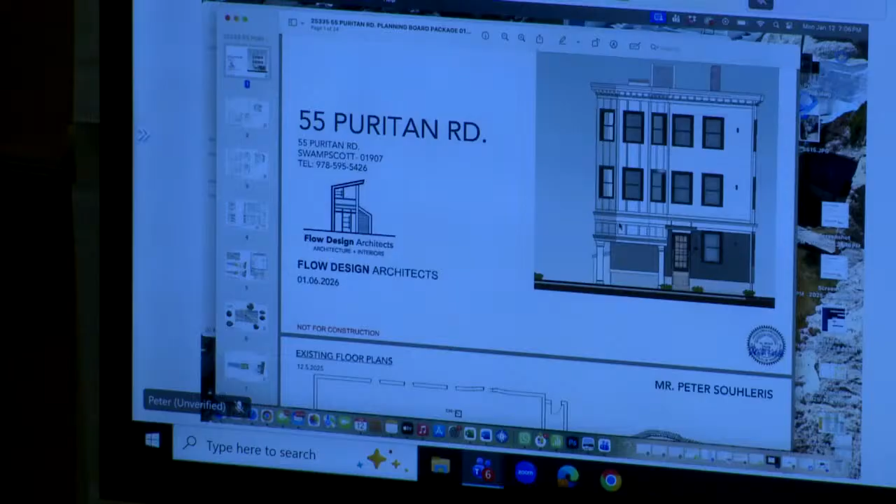All right, let's see if that works. Yep. So last time we were here, we talked about a lot of things, and I believe we did a nice job addressing everything we spoke about, and I just want to go through that with everyone right now. This kind of shows a little rendering of the proposed changes at 55 Puritan Road. I know we talked specifically about, can you see my, yeah you can, so we specifically talked about that front entrance.

Originally, it did not have a band going across as it actually does now - meaning currently. So currently the building has a nice trim band going around the front, right and left. And we had kind of stopped in the original proposal, the columns almost went all the way up to the band, so it did look a little bizarre. I'd have to agree, so we brought it down to something I feel the scale is more appropriate.

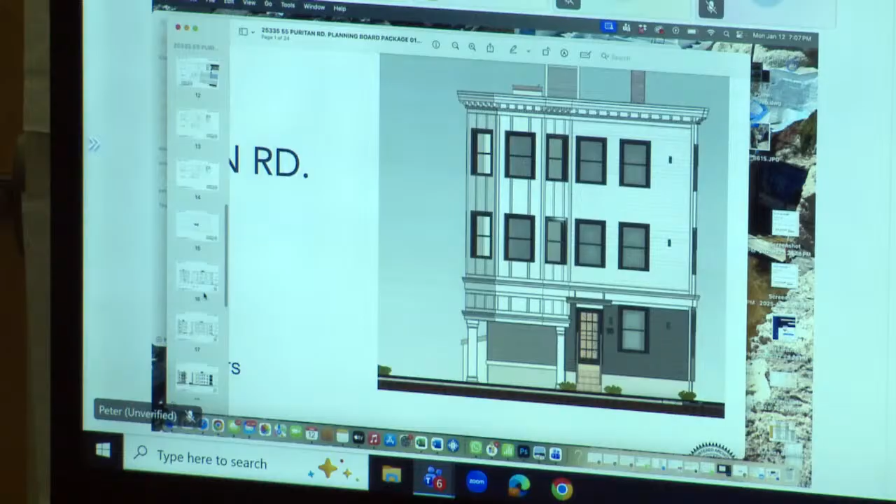We talked with Jer, mostly architecturally. We've played a little bit with a board and batten on the front and a classic siding to the right. But I've got a couple of versions of that, and I'll show you. I kind of nailed it down to two, which is right here. So one is just traditional siding all the way across.

We did add all the dentil work in here, that was not in the original renderings. We always planned on keeping the dentil work, and it was a little simplistic in the proposal, but we put a lot of detail in showing everything. So those are kind of the two options I'm toying with. I really haven't decided, I like them both, so I put them in here. I'm open to some feedback with the board and batten, they're both kind of classic and traditional.

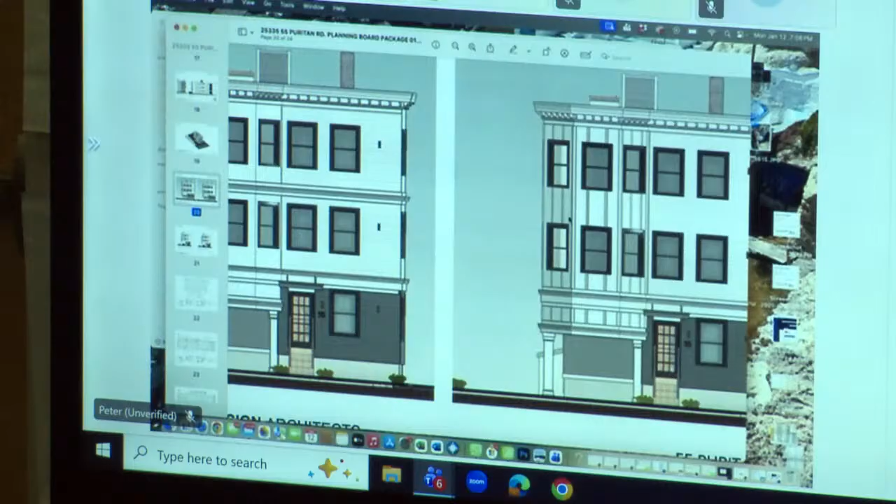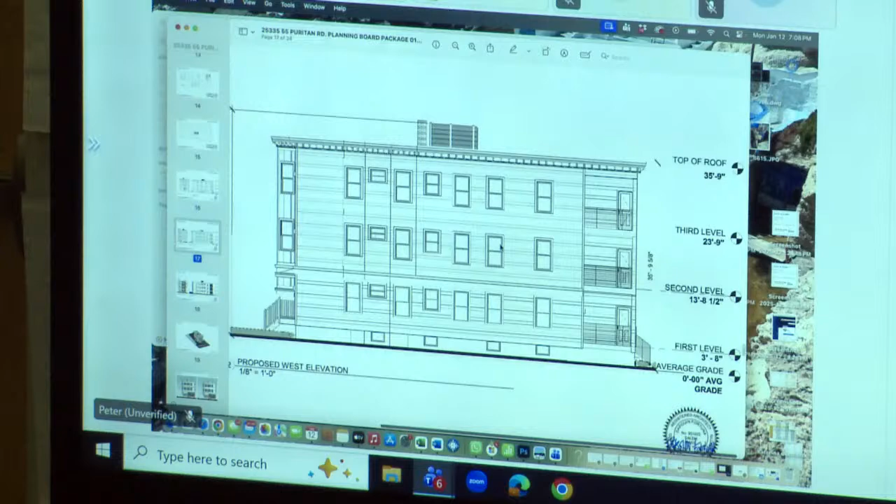But really the major thing we did was change the way the garage looked for parking. And then we talked greatly about the roof and access and elevation heights. So we went in, we did update all of that. We have an elevation line to the top of the roof at 35.9 existing - we're not increasing that. We are looking at a roof hatch and something to cover up the AC units, being that it's in a flood zone.

We're trying to do something nice to cover those up, and keep it below the existing chimney line that's there. The chimney line, as you can see, is a little bit taller than what we're proposing.

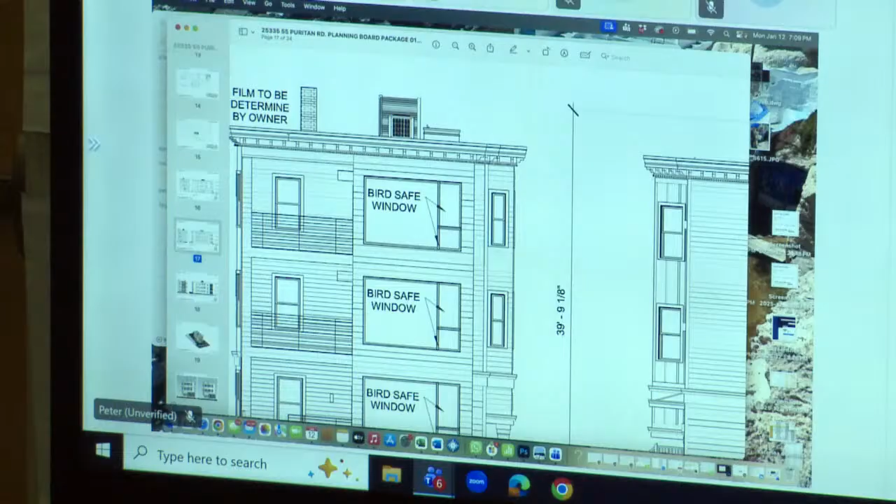We also talked about the parking and how we were trying to get one compact and 4 regular size cars. We have that cantilever, and I'm going to zoom in a little bit. I know there's a little delay.

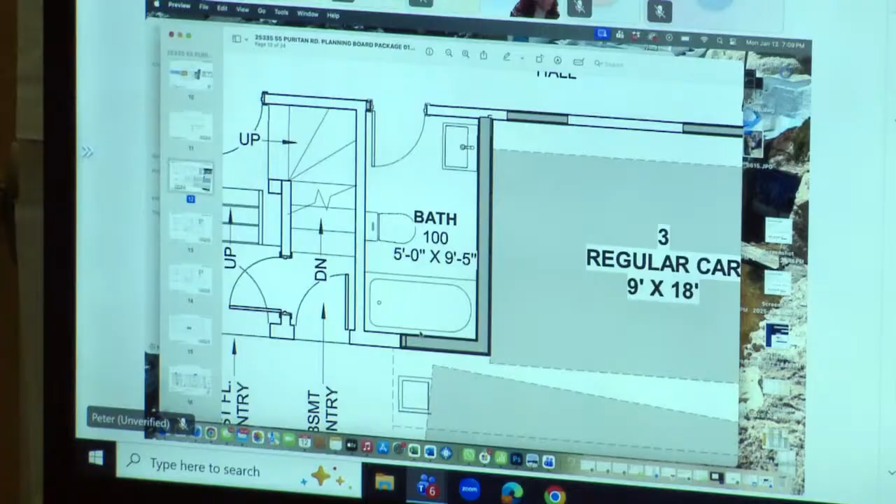Right in there, that line shows that that's cantilevering over, and we talked about doing something where it's high enough where the front nose of a car can go underneath, so we can get 2 full-size cars. And when I tell you I tried, I tried.

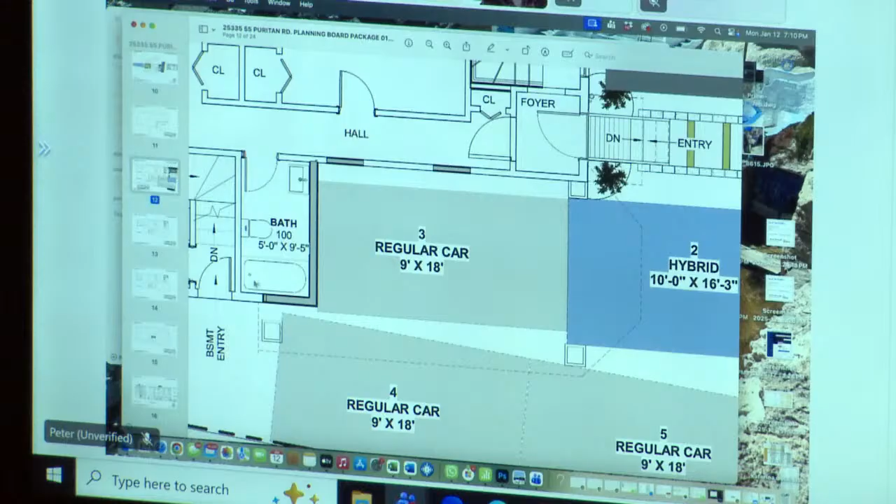We possibly can, but I don't want to mislead the board and say, oh yeah, we can do it, and then someone pulls up there. The only way to achieve that is to nosedive the driveway and put the water all the way into the house, which is very difficult. I will jump a little bit ahead and say I have the plans of the electric driveway that we talked about for the water. If we implement it, which I really would like to do, I know it's a larger cost, but it really makes a lot of sense for that water to be pitched off and not go into the house.

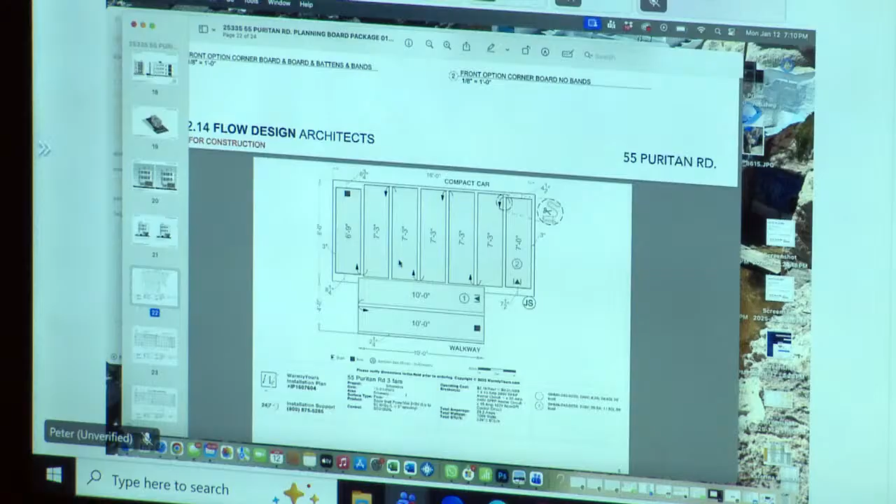So real quick while we're here, this scenario, and when they first sent it to me, I'm like, what is this? This scenario says it's a 16 by 8 compact car, and that 4 by 10 is the walkway.

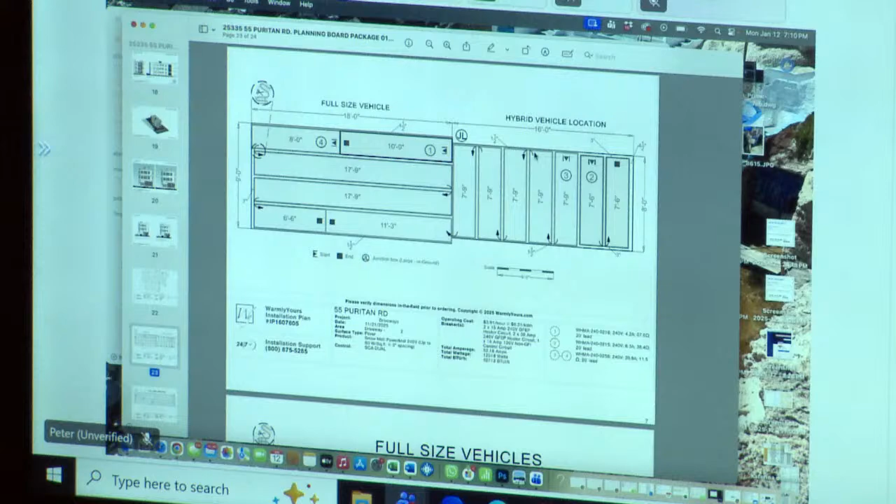So I plan on having it on the whole thing in the front, so everything drains. Then the next one is a full-size vehicle at 18 by 9, and what I'm calling a hybrid vehicle because I couldn't get the 18, but I'll show you what we did get. Then the next one is 2 18 by 9's.

So all this configuration, if it makes sense, is the electric mat configuration that they designed for us. In this section here, it's a 6 by 9 by 3 foot wide section. It's a series of mats that you put underneath the asphalt or the pavers, and then you use that. I just want to show that before I get back to the site plan.

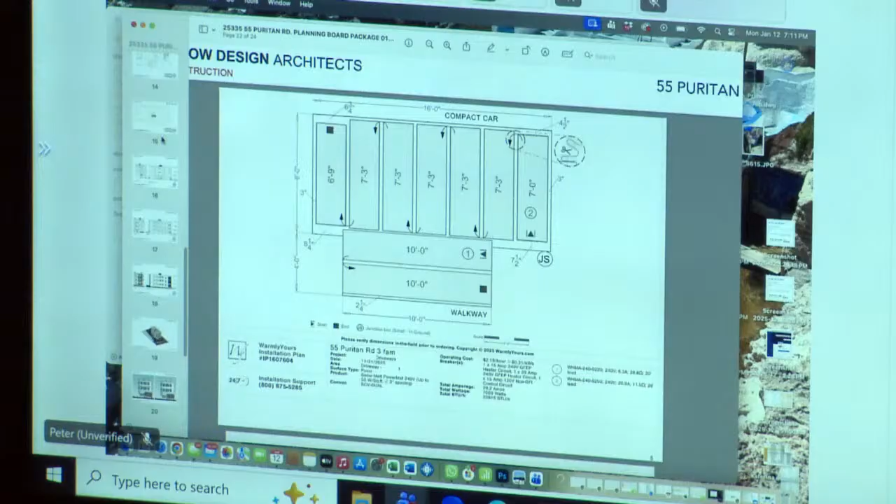And that basically heats the pavement? It heats it, yeah. I'm using it now in a location. It's amazing. There's a sensor. As soon as it senses snow, it goes on. It takes about 20 minutes for the asphalt to heat up, and then it stays on, you program an additional hour after the snow stops.

I talked to them about using solar power and electricity. It's a clever system where you'd like to say I want to use all solar power because there's no cost if you're using solar power, and it's green, and I love it. But sometimes they said the solar power just doesn't do the job, so they have a transmitter that knows that and switches over to AC/DC, whatever the power voltage is, and it kicks right in.

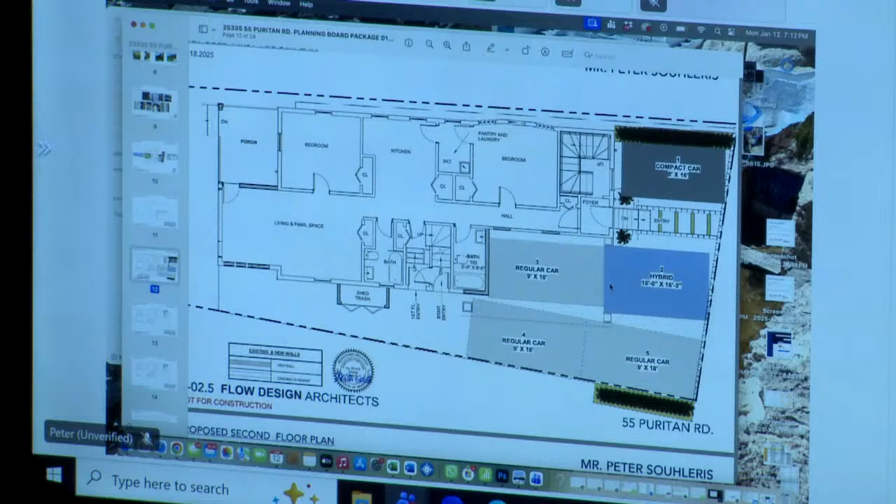So what I wanted to do is every unit, Unit 1, Unit 2, Unit 3, would have it on their own meter, metered separately. Everyone has it, everyone has to use it, and it just makes it so easy removing snow in that area because it's very tough to move around on Puritan in that street.

So, did I go over 5? No, you're good. Yeah, I'm almost done.

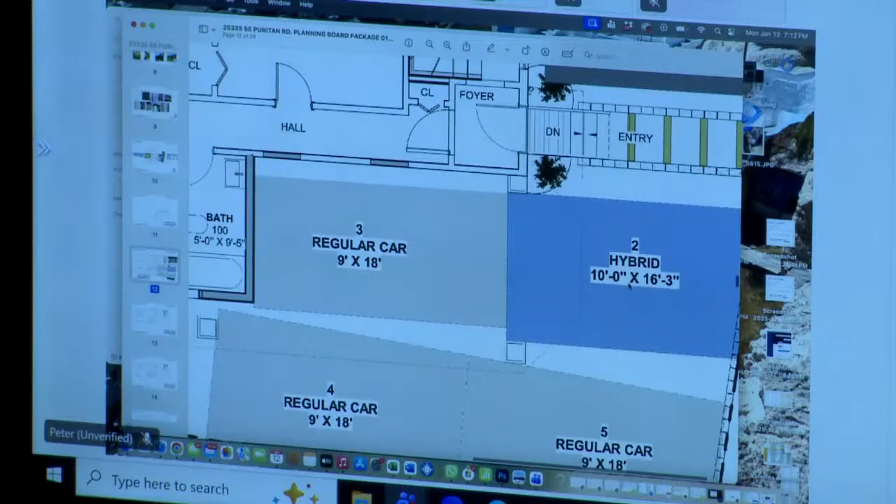The compact car, 8 by 16. The large cars, we have number 3, number 4, number 5. And then the hybrid, we got a little bit above the 16 for a hybrid with a 10-foot wide, that's why I call it a hybrid.

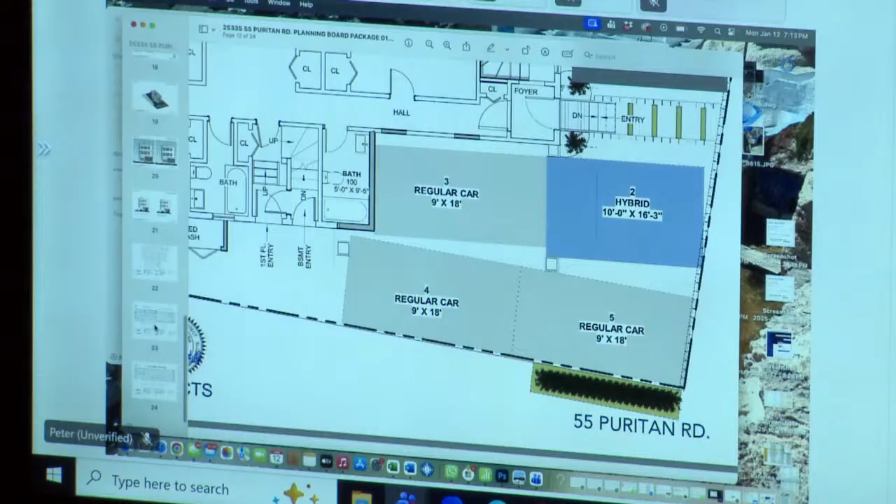We also added greenery instead of a fence to the left and to the right. I did speak with my neighbor Ted, and the neighbor on the other side, and I have some ideas of some shrubbery and so forth to use. We left it that we'll mutually agree upon something nice that's not too tall where you can't see backing out and making it a danger. But I like the effect of putting more green on there than not.

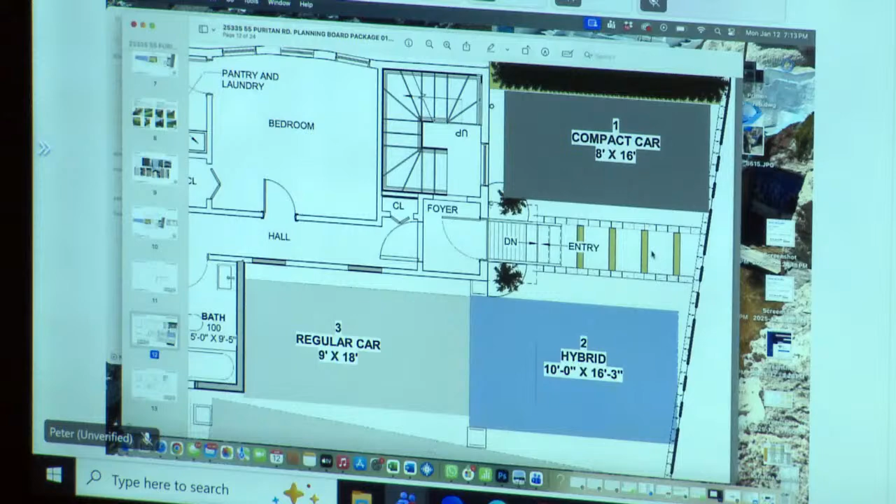And then we have a little bit more of the green. I don't know if you can see it on this, on the walkway in between, some kind of a paver. I thought it was a nice architectural touch. Other than that, it's really the electric heat underneath and the hot top that's going to be primarily what's going on there.

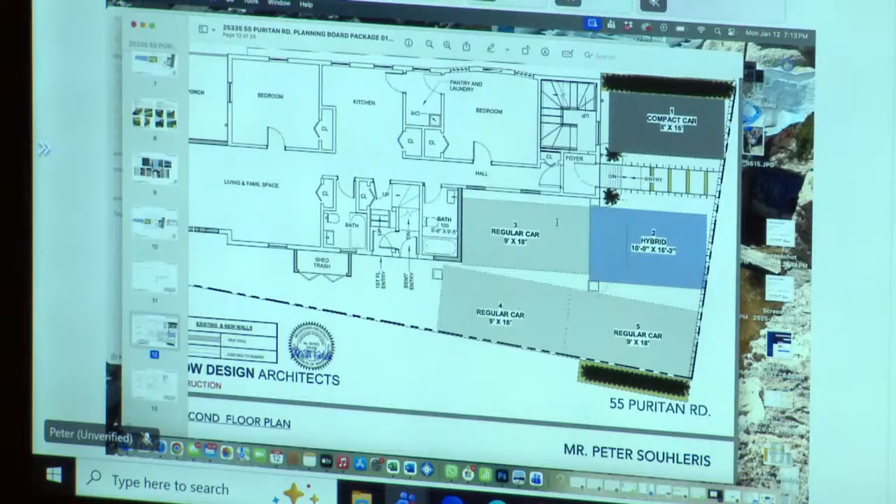I think I got it all. I can pause, obviously. I'll go over the 5 minutes and answer any questions.

Thank you. Jerry, I did look at that building, I did try to do that. I saw that building with the parking underneath and the cross bracing, and I tried versions of that. I just couldn't make it look as nice, but we did try that.

Any comments from the board?

And I'm an expert, by the way, on car sizes. I can tell you what a compact is, I can tell you what a BMW 3 is, an X3, an Audi 7, an Audi Q. I found that most of them were way under. Even like the compact cars were 12 feet, 13 feet, so you got 16.

A standard SUV, and I'll show you real quick, I've got a whole list of them right here. Standard sizes, like a Volvo S60, 15.6 by 6, a BMW X Series. I'll just get right down to like a large SUV, a Chevy Tahoe, 17.56. They're all under 18, but a standard like BMW X5 or a Jeep Cherokee, just under 16, 16.9, 15.7. And then the compacts are tiny, 13 and so forth.

So I was surprised and kind of happy to see that even if we had something smaller, a lot of vehicles fit under that 16. Other than, and even other than the SUVs, the Tahoes, the Yukons, Expeditions, the Escalades, those are over 17.

I think the biggest concern there was that, you know, we mentioned using some cobblestone type of thing to create a delineation between the driveway and the sidewalk, so that there is no encroaching on the sidewalk. So that's going to be conditioned and something that you'll have to monitor and make sure that whoever parks there is not sticking out on the sidewalk.

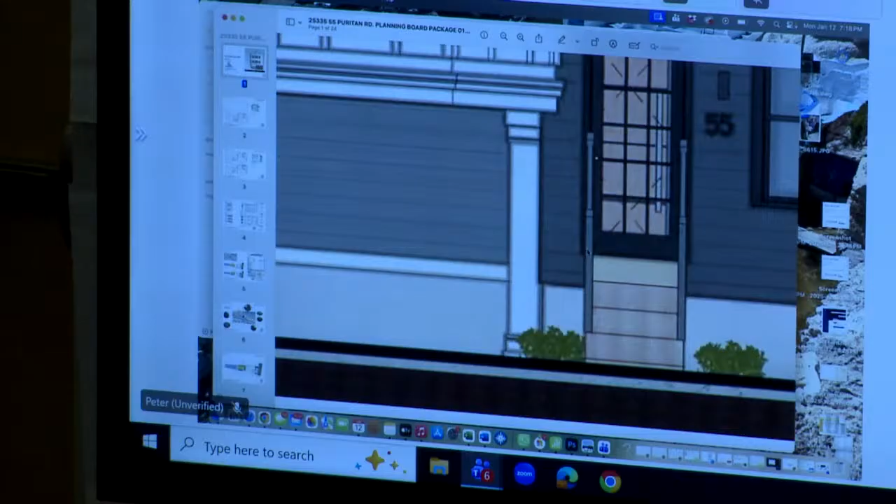The way it's drawn, it looks like a 36 and a 36. I think you'd be a lot better off, just because if you've ever had that sort of setup, it's tight, it's tough. It's tight, and the front door...

I have some wiggle room, especially to the right, to do that for sure. It looks like you could fan that out the staircase too at the top. If you needed to keep it narrow at the bottom, sure. But you do seem to have enough space when I'm looking at that, on both sides.

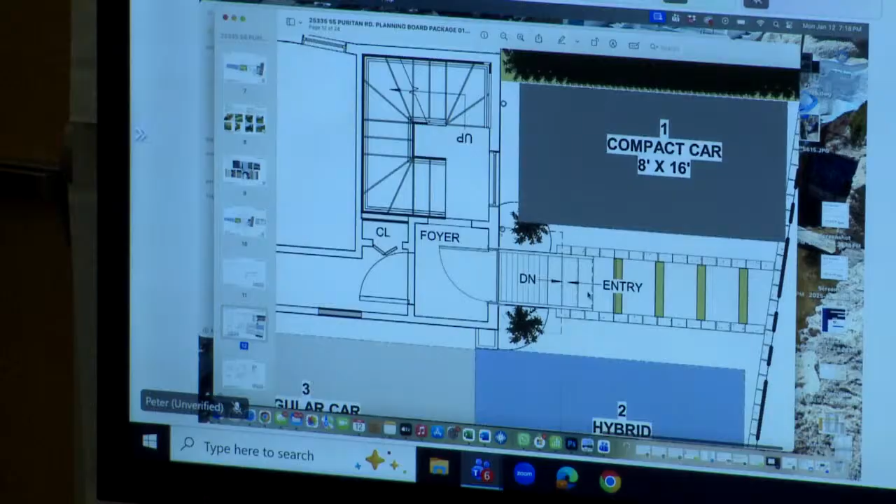The areas that you've marked for the cars aren't actually cars, they're the driveway width. So I would think making that a little bit more generous is just functionally better, but it will also feel more substantial as an entrance, with that getting pulled up there. It'll look great.

I appreciate the variations on elevations. My recommendation would be, especially with eliminating the first floor bay, not to just emphasize the turn of the bay. So if you're going in, I think you'd be better off maintaining the siding so the bay feels like something that is integrated into the building, not attached to the building, versus the board and batten.

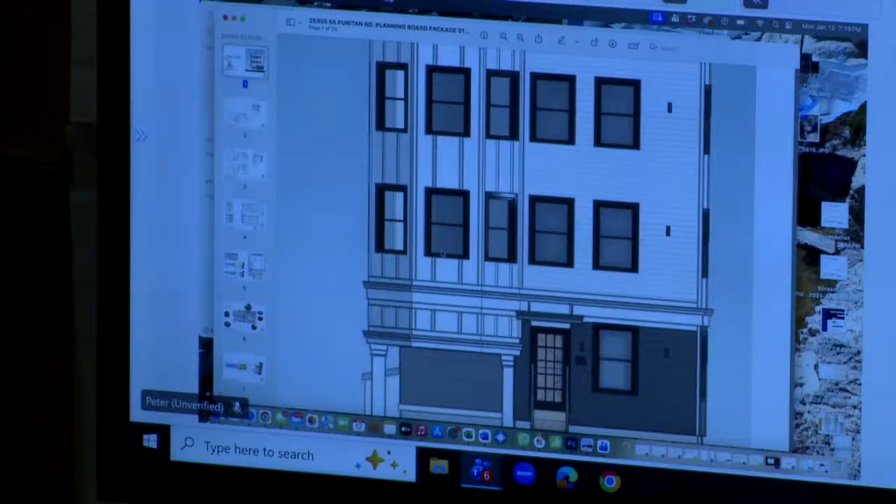Versus the board and batten, all of a sudden that unit feels like something attached instead of something that's integral to the structure. And I think that will, especially when you are going to be experiencing that from the street and looking up, you're going to be seeing the underside of the carport. So you're going to really want to feel that that's an entire piece, not something that has a surface detail on it.

I agree, I do think the banding helps significantly on it. I do notice that you've done some experimentation with either maintaining the banding as it is or even adding a second, and I think that both are successful.

Right now, this has light fixtures on the first, second, and third floor, as if the porches were still there. I don't think I would recommend that, because I feel like those would make it appear that there was a porch that was removed - which there was. But the other thing is that they're adding light where there's no light really needed, so I would avoid those.

I had a question around the hatch. I think it might just be a Revit thing, but there's two variations - you have a hatch, then you have a hatch with like a safety rail around it. So that might have just been imported unintentionally.

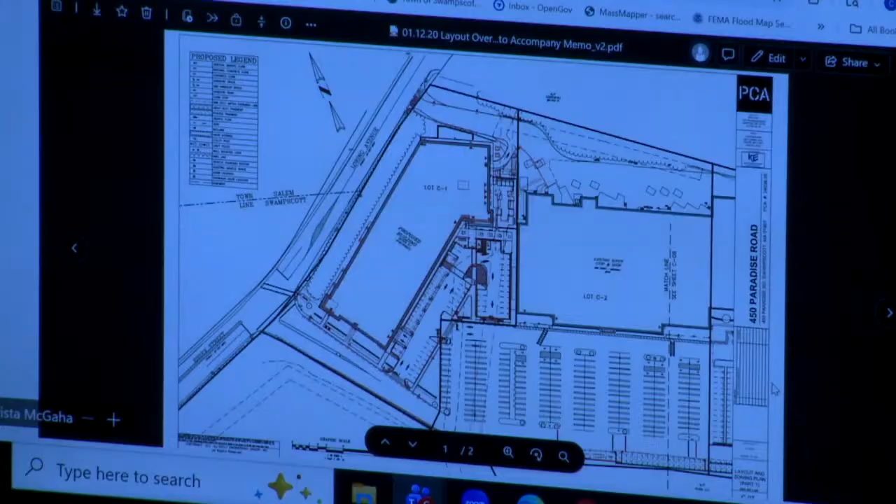Sure. Anything? These are hard to read, the overlays are sort of confusing. Everything looks like minor adjustments.

I'm seeing the addition of some parking, which is great to see on the side here. I'm assuming that's based on site discovery. Look, when we're in the field every day, we're trying to see how we can make this thing better. Once you're on the ground you get a feel for it, and I think everybody recognizes, based on Sam Walker's opening, that we're going to be parking challenged, so we want to make sure we could carve out every space.

Keeping it as honest to what we're trying to accomplish. But all of that seems great - it seems like you made some discoveries in the field, and that's allowed exactly for it. That's exactly what this is, adapting to the central tenants in the middle, just a minor increase in building size, but within between the two buildings, so it's not an impact. Externally, some realignment of sidewalks based on discovery. I think the word 'tweak' would be the word, but I couldn't find tweak in our vocabulary, so we put modification.

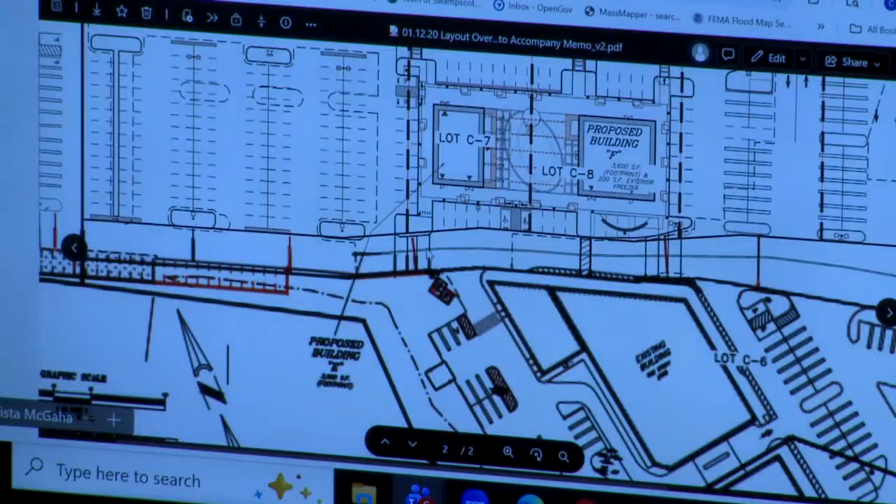And then I'm assuming the areas on lot C-7, back near the rear of the grocery store and that whole entrance, that's a functional realignment based on vehicular access and dumpster pickup and all of that, correct. We had a meeting with Stop and Shop, we verified all of their access requirements, and we also coordinated with the city of Salem for that curb cut onto Loring. So those are the final results of the meeting with Stop and Shop as well as the city of Salem.

Okay, great, very good. And I can see these corrections have been made over here. Okay. Anyone from the public here to comment or online?

I guess, Mr. Chairman, what we're asking is that the decision now reflect the new site plan as opposed to the old one, because ultimately it's going to be built based upon the revised plan. And we don't want there to be any misunderstanding for anyone who does research at the registry as to which plan is the plan of record.

Just an amendment to the existing - that's exactly right, to reflect this. Instead of saying 'as per certain plans submitted on certain date,' it'll be 'these new plans submitted on such a date,' as approved, assuming the board approves them. What was the date they were submitted? The only other thing we submitted was there was a question about the dumpster screening, and we submitted that as well.

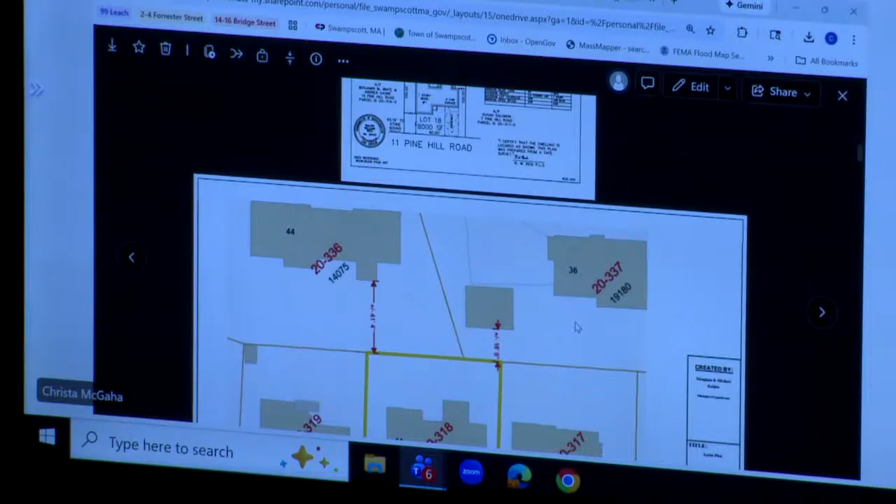The current home, how many bedrooms does it have in it? It's currently a 2-bed, 2-bath, and it will be a 4-bed, 2 bath, 2 half bath. And are you aware of the I&I fee that we have for the additional bedrooms? Yep. Let me just see here.

I will chime in and let you all know, as the board, that discussions that happened earlier between the applicant and I surrounded what determines a complete application. So this revised application in front of you includes architecturals of the existing, like this rendering in front of you that they submitted today. I think, Jer, I saw that you submitted some thoughts as well, and we might have a discussion right now on what the requirements are for a complete application, so we can move forward. Yeah, that's a good point.

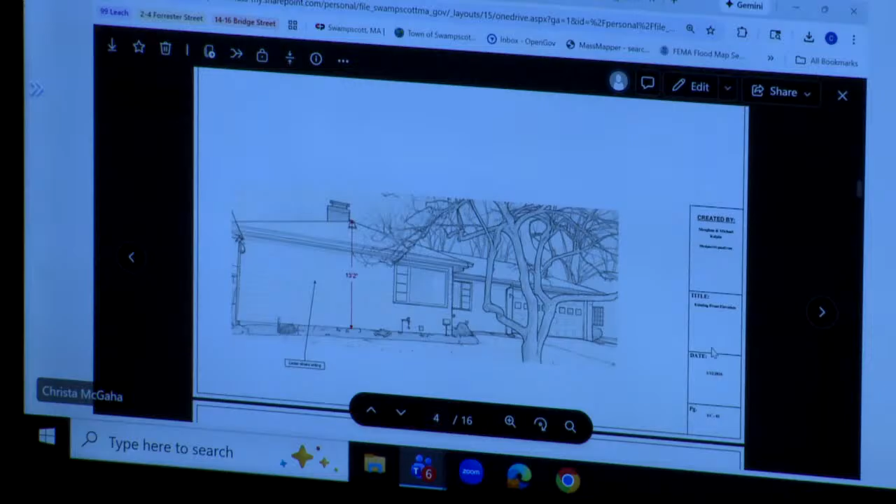If it works for the board, I think we should still have a discussion and go through it. I think that's only fair. There might be some missing elements from the petition, and we'll want to make sure those are there, probably before anything's approved.

Okay, what can you tell us? Sorry, specifically which one? Well, go ahead and explain, unless you'd like me to.

So it was the side-by-side existing and proposed. It's a little bit unusual, the perspectives we received. They're not detail by detail what is existing compared to what's proposed, it's more of these sketch-like drawings. And there was also comment about maybe the detail required for the interior spaces as well, for the architecturals. So that's potentially things we could discuss for completeness.

And we have examples we can provide probably, right? Yeah, we do, and in fact I think we have some applications I've mentioned in the past that are really good textbook examples of what we'd like to see, even though some of those are different than this.

Essentially, what we want to look at is the plot plan with all of the abutting properties, indicating the distance between the closest contact points, if you will, of your property and the neighbor in each direction. And you do have some of that. It's a little broken up, but it's certainly readable for us.

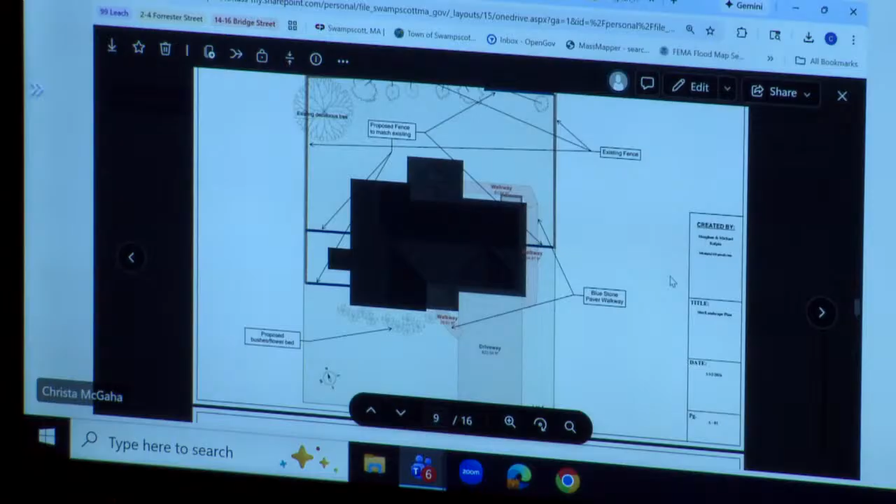I just feel like this is our family home. We have a lot of money tied up. Oh yeah.

We had given everything we needed, but we need to make sure that what we're doing is aligning with what the bylaws are asking us to do. So please don't think of it as a personal thing. Right, it's not personal judgment, this is just what we have to work with, basically.

Can we gather enough information from what we have? Being new on this, I don't have that answer, and that's why I was posing it this afternoon when the drawings came in. The other thing we ask for is an elevation that includes the houses next door, especially when a building is increasing in height, so we can make sure it's in proportion with what's happening on either side and not negatively impacting that.

One question I did want to ask was regarding the bulkhead. Is the current bulkhead traditional? There is no bulkhead right now. There's no bulkhead at all? Yeah, okay, that's why, because that one piece there...

We need to actually look at that, because this is moving outside of the footprint. So we still have to look at that within the setbacks. It doesn't encroach, but it's still a change, and we have to watch that a little bit, because I know this was proposed as something that's not changing the footprint, so I just want to make sure we're not changing the footprint.

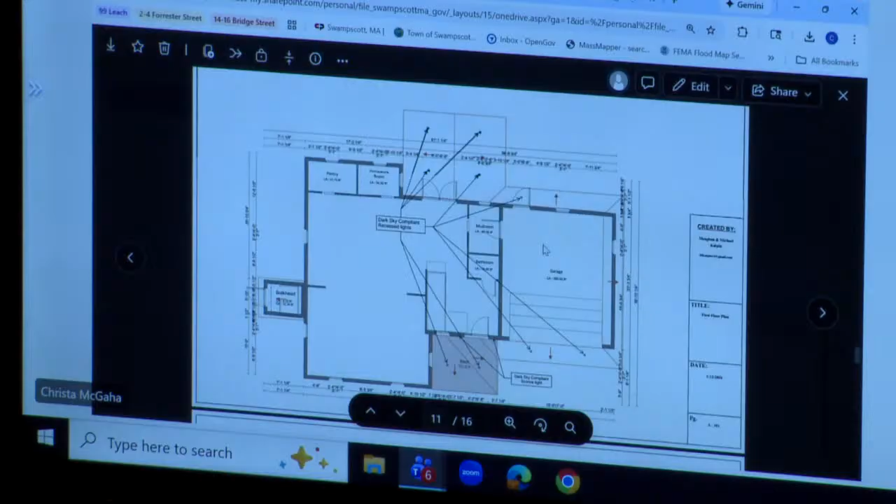That's a board question—there's a submission of layout. I personally don't think that's of great importance, but as a planning board, when we approve something, there are areas I've got concerns about, like your alignment with walls structurally. Have you had an engineer go through this? Just the supporting of—you're pulling the wall in over the garage on the second floor, so it's not aligning, if that's all stuff you've figured out.

There are a few moves in here that concern me. You don't have sufficient roof structure on your porches—they're shown at a thickness that would be problematic. So there's a number of things, but if we approve things, I'm assuming that would land under the building inspector, not us. So for what we're looking at, the main thing that's missing is the streetscape, based on its size.

The front elevation showing adjacent properties—I'm not worried about that because it's within the zoning requirements. Still less than 28, right? Yeah, and it's still quite reasonable for that neighborhood, being familiar with it as I am.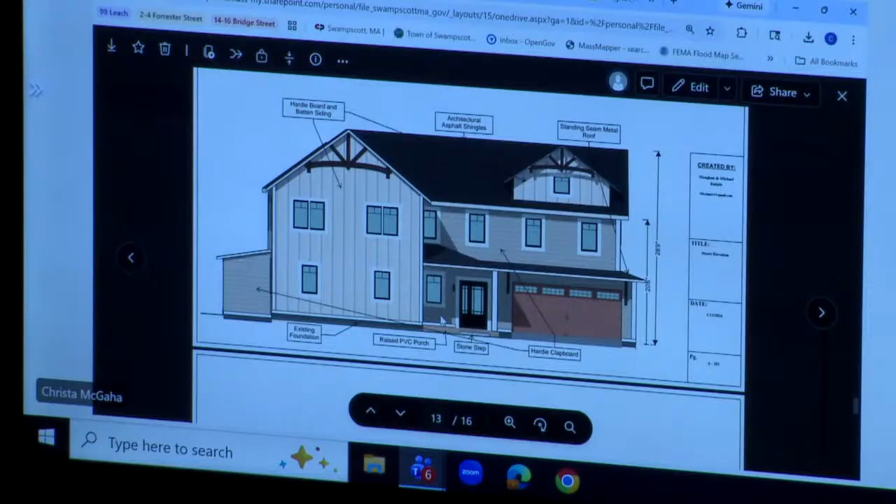Aside from that, we're adding a bulkhead for access, basically. And dimensionally, the setbacks aren't moving—in terms of height and every other way, we're not changing driveways. You're using the same driveway, the same garage. We're going to repave it, but it'll be the same. And no landscaping is being reduced.

Essentially, I think what we were getting at was that our process was out of sync with this, even though you ended up supplying us with what we needed tonight. Because this was substantially complete when you submitted it, I personally don't have a problem with it—I don't see what else I'd need. If I saw it any differently next month, it's not going to change how I would vote on it right now, put it that way.

Okay, that's how I feel. My questions were really specific to how exacting are we in what is supposed to be submitted. I would say this is a circumstance where it's so precise—adding a second floor to an existing footprint, and being well within zoning compliance for everything, for use, for height, for all of it—that it does nothing but improve the site, and there's no detrimental aspect to it. Because of that, I don't have a problem with getting the dimensional piece of it.

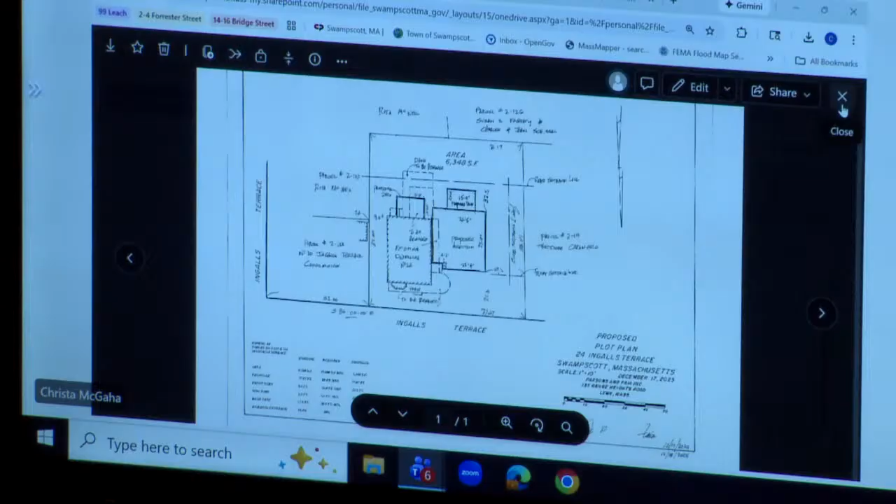The proposed addition will be dimensionally conforming. Petitioners intend to keep intact the existing structure, which was built in approximately 1852, and have designed the proposed addition to maintain the historic appearance and integrity of that existing structure. With that, if there's any questions from the board members, we have additional material that we filed today at request of the town.

So you said that, I mean, I visited the house without you, Doug. I went up there and nosed around on my walk the other day. Clearly, no one's living there now. It's been vacant for 4 or 5 years, over 3 years.

Yeah, it looks like it's definitely coming apart, and there's a lot of rotting around it. Surprisingly enough, the foundation and everything, the floors are all straight, the walls are still standing straight. It looks like it's falling apart, which it is. Some of where the wood meets the foundation is rotted out. So it looks like it needs, the structure would be removed.

I can't imagine how you'd repair it, so you're not taking down any of the walls? The building's staying just like it is. All we're doing is, I'm Doug Dubin of Double E Construction, Eastman LLC, my business partner and I've known the house for a while. I know Ingalls Terrace. I've done personally a bunch of old historic houses. We're going to gut it to the studs, basically, rebuild any headers that need to be deep to meet any code.

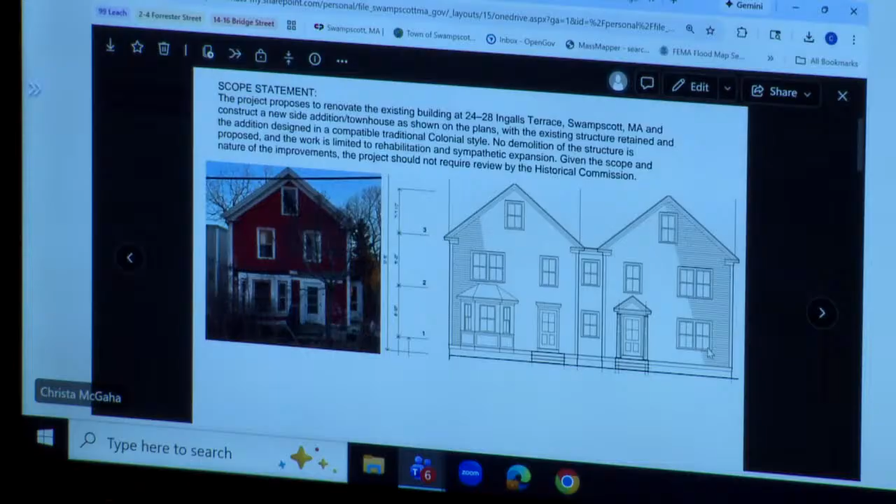Basically, the relief we're asking for is because it's 2,000 square feet, but the building itself that's there right now is staying just like it is. We're not changing the footprint. So you're going to have to take out the right-hand side of it? No, actually, the foundation stays and it just comes off of it and builds on top of that.

We need to rebuild part of that foundation. It's going to add a new foundation onto that section right there, and there'll be a firewall right between the whole 2 buildings. I know it looks weird, that overhang on the right side you're talking about, but that will be part of both buildings right now.

It's been abandoned for 3 years. The goal is to make it into beautiful townhouses for sale. We are not keeping it, I'm not moving into it. I'm going to make sure all the landscaping's perfect.

We have parking existing on the left side. We're gonna add 2 parking spots on the right side, as per code. We're going to accommodate all the neighbors while I'm doing this, to make sure work trucks are limited to probably 3 — plumber, electrician, that type of thing. Everyone else will park on Humphrey Street.

I will be on top of neighbors to make sure they're good, make sure dumpsters aren't blocking anyone. We'll always have parking. If anyone's there, someone will be there to make sure that this site is going well, because I want it to be done well. As you guys know, I've done a lot of work around town forever, and this is mine, not a customer's, so I'm on this.

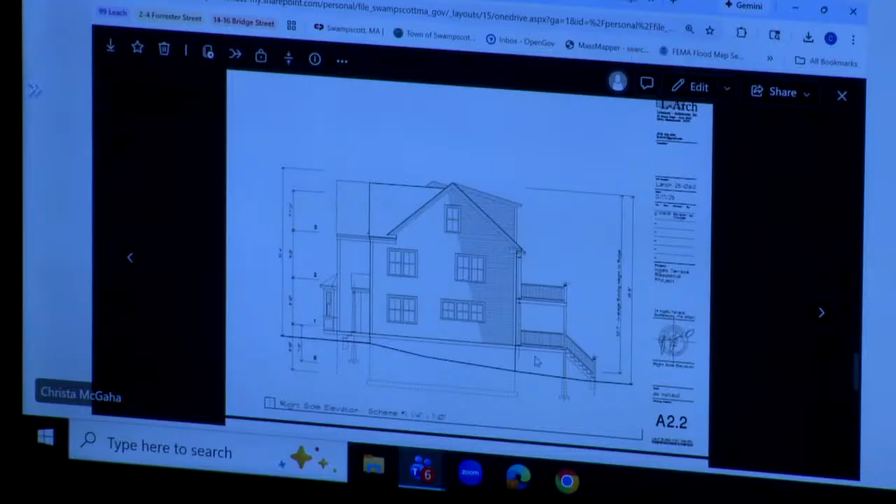The one question that I have — we were talking about the site — is the topography, because I'm not finding any drawings. There is one picture that shows the side elevation, one of the ones I brought you tonight. You can see there, and in our architectural print, he went in and laid out the elevation with our surveyor. So, do we need a site plan that shows the elevations on record?

With the topo on record, I would have liked to have seen a site plan with a topographical plan on it because this is so unique. It's not really changing though, that's the thing. Yeah, we weren't modifying the site at all.

We did record it so elevations are correct, and made sure we didn't exceed. So the plans are showing the correct elevation where the building interacts with the ground, matching the floor heights right through everything. They have a full architectural set. If you look at the one showing the side with the porches on the back, you can see the angle coming down to the wall.

We're not changing the existing topography whatsoever. And I guess the other thing, it looks like it's about maybe 4 feet of foundation, what is your foundation material?

The new structure will be concrete, which I'm probably going to put a veneer on. I'm not gonna give too much information yet since I'm not totally positive, but it's gonna look solid. The existing foundation's brick, isn't it? It's like 16 inches of brick.

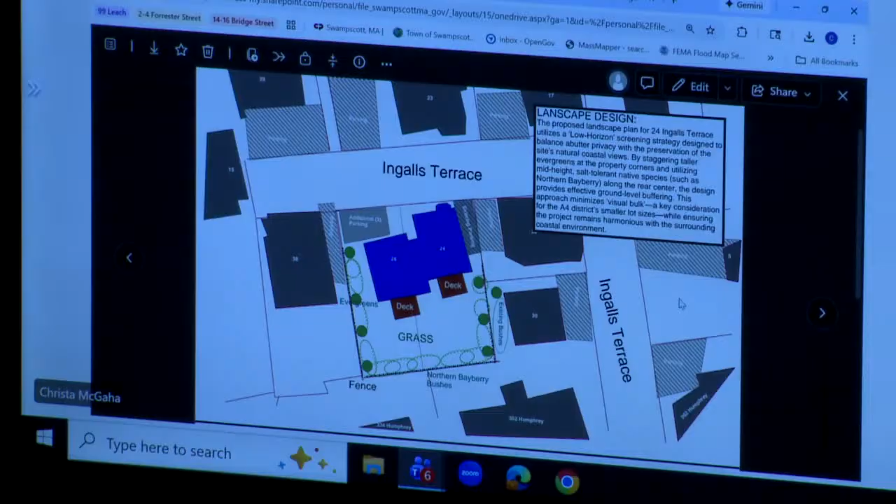It's interesting to think about, from the people that live up the hill a little bit, there'd be concerns -- you can see how you'd say, oh, take down those big trees so I have a better view. On the other hand, you're like, that tree's so nice, I don't want it to come down. I don't know if it might make sense to look at the property and see what's there.

The tree actually is the only shade I get. I have no trees on my property, so in the morning it rests over the house. Thank you. I'm Theo Carangelo, 30 Ingalls Terrace, and I'm assuming you like that. Is that good? Yes.

I think that area, because of the parking issues, the house -- it's an old street, a pre-car street, and sometimes those are the ones that get lost to blacktop. And that's the one thing up there, I think that whole area...

is over blacktopped. Oh yeah, there's a number of things in there. I'd love to see the town actually create a plan for up there, because what's happened right now is it's just paved over and paved and paved, especially on the uphill side -- it's just completely paved over. So if there was... now that this is done, I'll push Gino to put that on the pavement.

But the thing is, this is an example of a Swampscott street that's been paved for utility, but it's sort of uncomfortable at this point as a pedestrian -- you come down the steps and you just land in a parking lot. So if there was a way for the town to evaluate it and see if we could have some planning in there, I think that would be a big benefit.